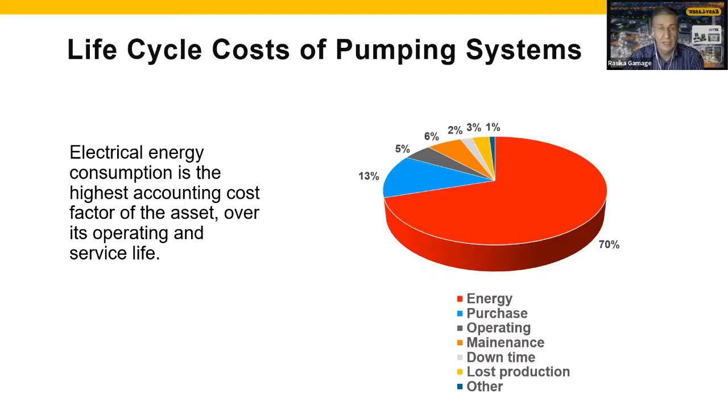So first, what does it actually cost to operate and own a machine? You may be surprised: electrical energy consumption is the highest cost factor for an asset over its operating and service life. 70% of an ordinary machine, taking an example of a pump, is associated with the use of energy during the machine's full life cycle. It's quite high compared to all the other parts like purchase and other operating costs related.

What does shaft alignment actually mean? We're talking about rotating equipment that is connected to each other.

Shaft rotational center lines aren't collinear at a point of power transfer when the machine is in operating condition. Whenever we have this kind of condition, the machine is misaligned. In operating condition means in a warm situation, where the machine parts have reached their operating temperature.

There's also something considered as temperature growth or thermal growth, especially with gas and steam turbines. The savings that can occur from precision alignment are often overlooked, while energy represents hundreds of thousands of dollars in the operation expenses of a whole plant. A significant portion of these costs are purely waste, because misalignment of coupled machines costs us valuable energy dollars.

Precision alignment of machine shafts has proven to cut energy costs by as much as 10%. Now you would say for one machine, 10% energy could be, depending on the country, affordable, not expensive, but nevertheless 10% over time for many different machines can make a lot of money.

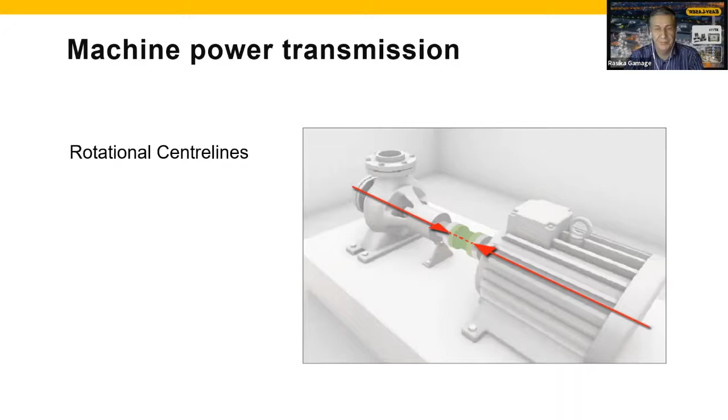What is misalignment? We differentiate here between two main causes. The first one shown is angular misalignment. That is when the center lines of the two axes, the shafts of our machines which are connected with each other, are not parallel to each other in operating condition.

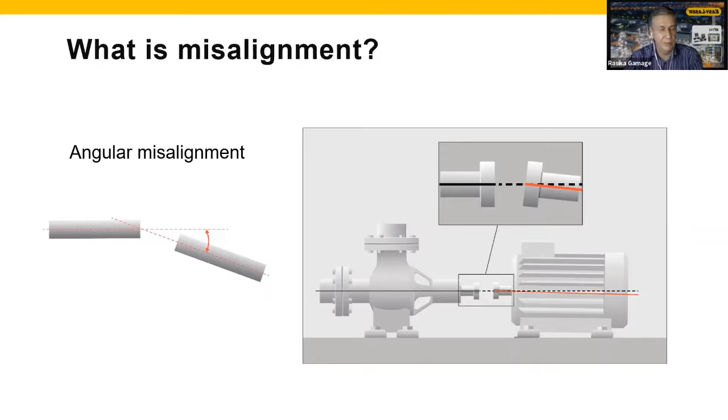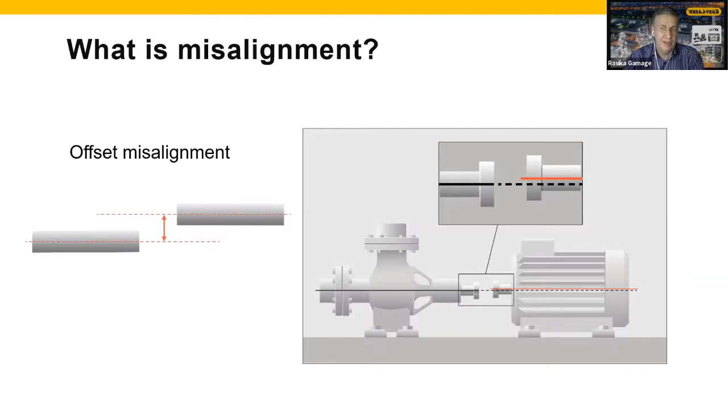And the second is an offset, also called parallel misalignment. This is the case when the center lines of two axes are not concentrical, but they are parallel. Realistically, in practice on a machine, you will find a combination of both. So angular and offset misalignment come together very often.

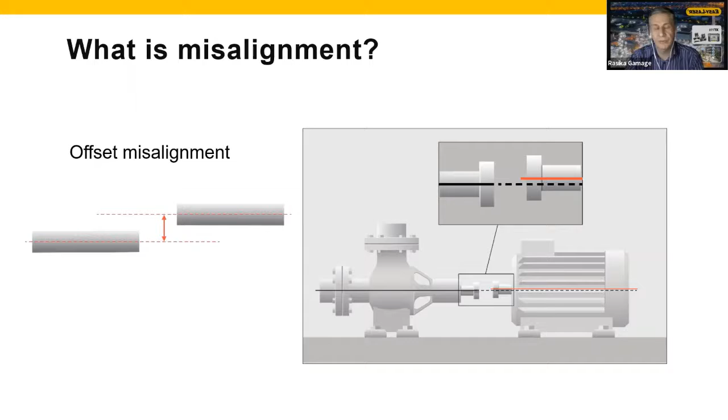Now, if you think about the consequences of misalignment and the physical motion of a rotating machine, I tried here to illustrate it in a simple way, referring to the bearings. The bearings ensure rotational movement through their construction to reduce the friction of the rotating shafts in their housing. So to eliminate and reduce the friction to a minimum, we use bearings.

Inside these bearings we have a lubricant. This lubricant is found in a very thin gap between the two surfaces, the raceway from the inner race and outer race, and the rolling elements in between. Now, the thickness of this lubrication film is about 5 microns thick.

So if you consider even a load zone and a small twist of the shaft that pushes the bearing to one side, as indicated on this picture, we are creating stress. And 5 microns is actually not a lot. So therefore, we are creating a potential impact and stress component that damages subsurfaces in the structure of the bearing.

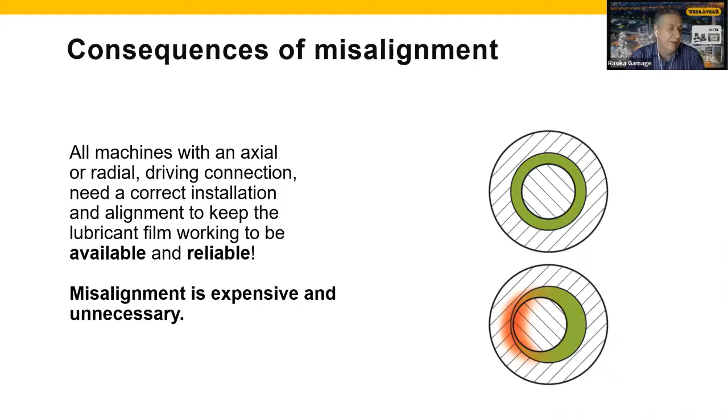This kind of damage, which you cannot see at this stage, is generating and getting worse over time until the bearing is damaged. So all machines with an axial or radial driving connection need correct installation and alignment to keep the lubricant film working, so that the whole machine is available for a long time and, in the end, reliable.

How do we recognize misalignment from an operating machine? Misalignment is the root cause of many machine breakdowns. Often technicians, floor shop people, and engineers talk about the most occurring problem on rotating machinery being bearings that are failing. And it is correct, but there's a reason why this bearing is failing.

Other cases, maybe seals are damaged, shafts and couplings. In fact, it is widely believed that 50% of all machine failures are due to misalignment of the machine train or coupled machine. So precision alignment significantly increases the life of the machine.

Misalignment itself leads to stress and forces on the bearing. Misalignment can be very dangerous and also harmful. And again, it is actually expensive and unnecessary.

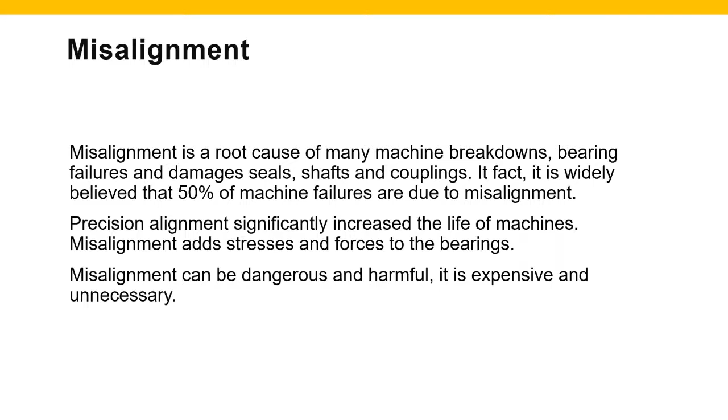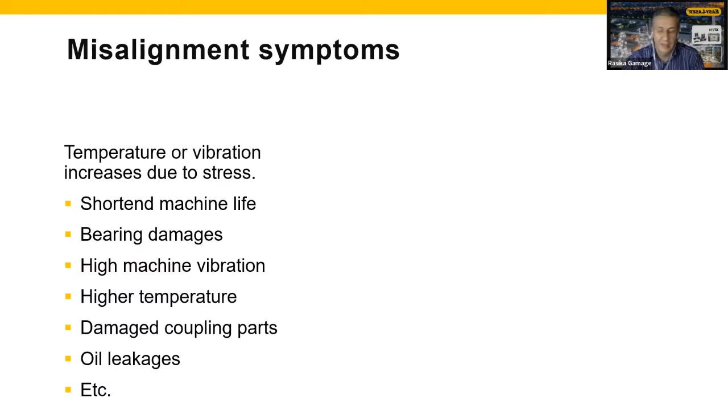Symptoms to recognize machine shaft misalignment are, of course, temperature, because wherever you have friction as a consequence of some stresses, heat is developing. And further down, vibration occurs. So temperature and vibration are good indicators to assume there is some stress, which in most cases is related to misalignment. But also shortened machine life is a symptom.

Damaged bearings is a symptom. High machine vibration, of course, higher temperature, damaged coupling parts, oil leaks, etc. So we see here some pictures from a thermography image of an operating machine with hotspots of temperature indicated, because there is some stress in this machine. We see measurement readings in ISO millimeters per second, which is the velocity unit of vibration in the machine.

If you would do, as a vibration specialist, a deeper analysis to diagnose, then it could be a frequency spectrum where the order number 1, 2, in some cases even the third order, are associated with symptoms the machine can have regarding misalignment. So orders means frequencies associated with the running speed of the machine times 2, times 3, etc.

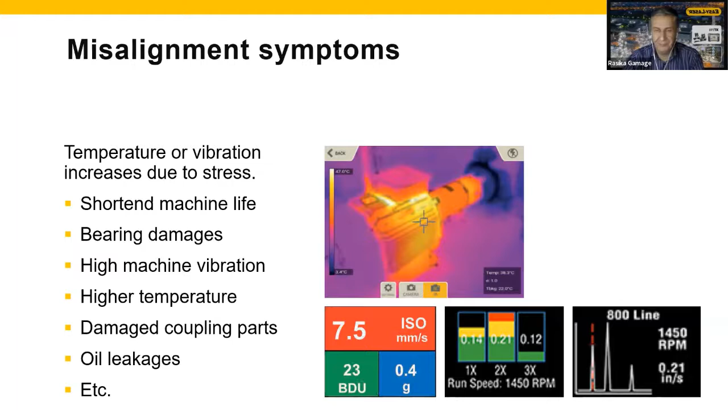How to verify misalignment? Well, it's a very easy task if you have the equipment available. So perform laser shaft alignment with a precision of up to 1 micron, which is 1/1000th of a millimeter, to check and compare it to tolerances. Laser alignment instruments can have built-in tolerances, which are based on the machine size and speed, and then you can compare it.

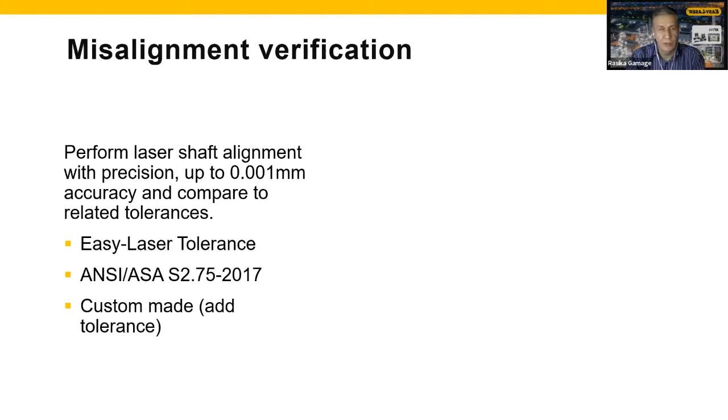Easy Laser, for example, in their alignment products have their own tolerances, but we're also using global tolerances like the ANSI standard, American National Standards Institute. And for some very special cases, customers can also create their own custom-made tolerances.

So an alignment check with a laser represents once the shaft from the stationary machine, and second, from the machine that is possible to correct in its position, called the movable machine. And this requires only a couple of minutes to check the condition of a machine.

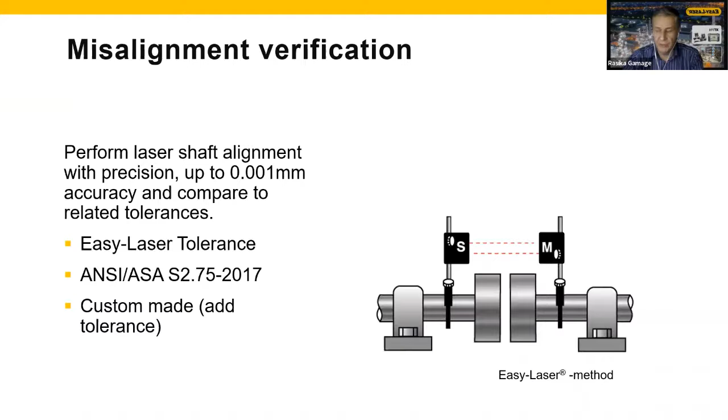Now, we want to ensure that the machine is precisely aligned, and this starts actually on the foundation. So whenever we talk about precision and energy savings, we also assume that the base or frame structure of the machine is actually very flat. In some cases, it's even required to be at a certain level. It should not have any soft foot problems, looseness, or runouts of parts of the machine itself.

And then we can proceed to do the corrective action to align machines. That means bringing shafts, rotational center lines, collinear at their operating condition. And that's, with a laser instrument, very easy to achieve, pretty straightforward—much faster than traditional methods where you need to be highly skilled to use dial gauges, and it is way more accurate than that.

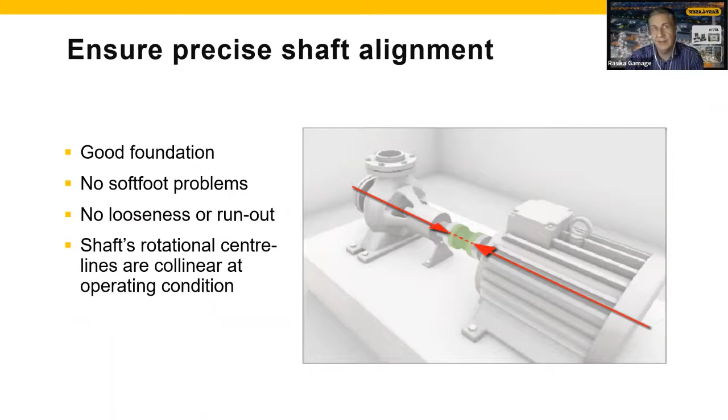Misalignment and energy consumption. Before we get to this point, I'd like to show you what actually means precise shaft alignment. While there are a number of factors to consider, the key issue when it comes to the relationship between misalignment and the damage that can be done to the machine is the machine speed. So if the speed of the machine is greater, the damage potential to the machine is also greater.

Here we see a misalignment tolerance guide that gives us the micron per millimeter, which is the deviation of the point of power transfer between the two shafts connected through the coupling. On the right axis, we see the angle of potential misalignment in degrees, and on the x-axis, you can see the connected speed. So the higher the speed, the lower the allowed angle in angular misalignment, or the deviation from transmission in the center of the shaft.

Just taking an example from a 3000 RPM machine, the permissible alignment condition between excellent and acceptable is 0.8 micron per millimeter—that's the diameter of the axis of power transfer, and that's pretty precise. A laser alignment instrument can achieve an accuracy of 1 micron, so right where we need it in regards of where alignment is necessary. Where we're reaching the red area, that's harmful for the machine—that's 1.2 micron for a machine running at 3000 RPM.

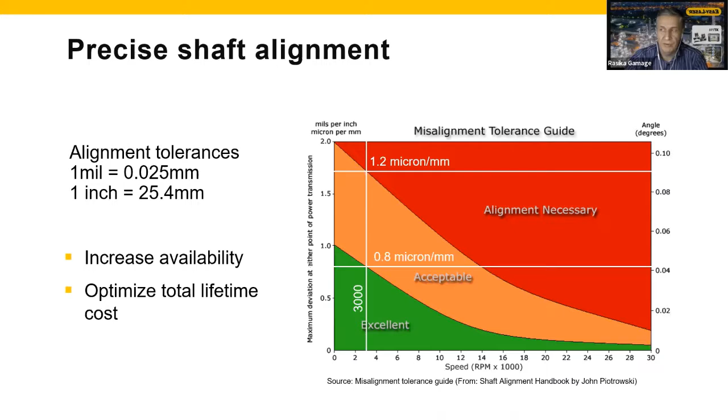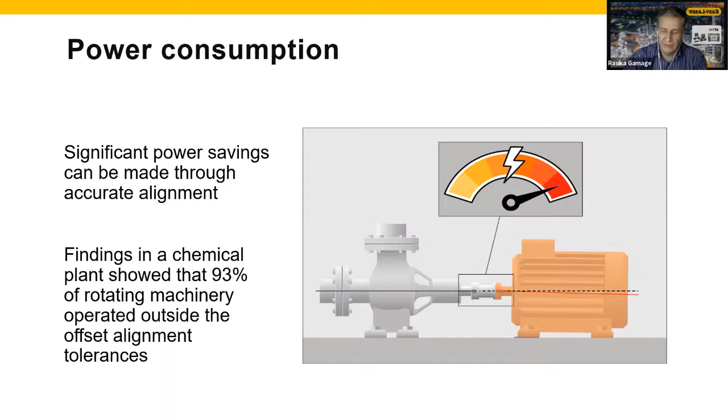Significant power savings can be made through accurate and precise alignment. Here we show findings researched in a chemical plant, which showed on average that 93% of all their rotating machinery was outside of the tolerances we just saw. Tolerances exist on the market to compare to. Precision alignment reduces energy consumption, and this reduces energy costs. Energy consumption has the greatest potential to reduce costs among all of the machine life-related factors. We're coming soon to a couple of examples—this is the potential we mentioned earlier on another slide.

You can actually save up to 10% quite easily when your machines are in a precision alignment condition. So precise machine alignment eliminates the reaction forces and reduces the energy consumption by up to 10%.

This is a completely independent study from a university that shows a misalignment condition of 1.6 millimeter compared to 0.2 up to 0 millimeter. And what is the energy consumption here in comparison? We're reaching between 0 to 12%, 10%. So this is really the potential of saving energy.

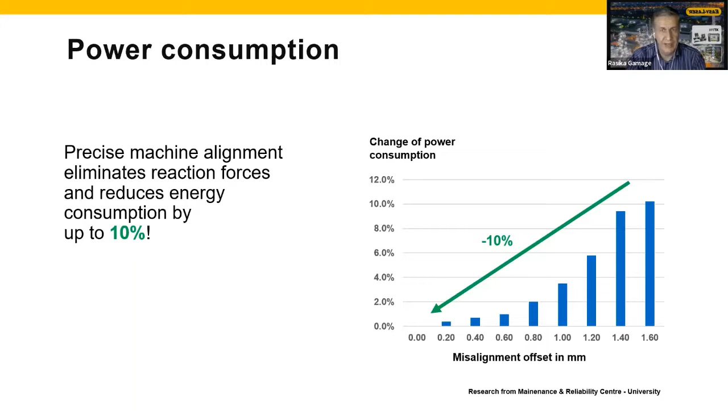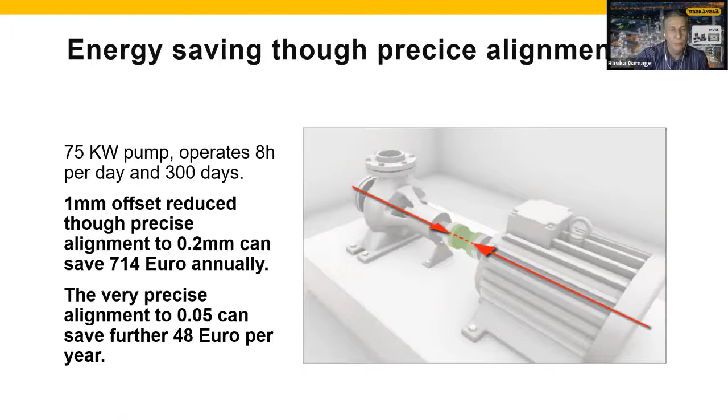Other costs here are associated with precision shaft alignment. Again, we're coming back to the bearing because they are very crucial. And they are also the components that suffer the most from an existing misalignment. So misalignment puts unnecessary load and forces on the bearing.

All the experts and many researchers worldwide have proven, and all of the experts agree, that actually less than 10% of all operating machines, and here related to the bearings, reach their designed lifetime. That means they fail before they are doing the specified work. And this is due to many causes. One of them, contributing to 50%, is misalignment.

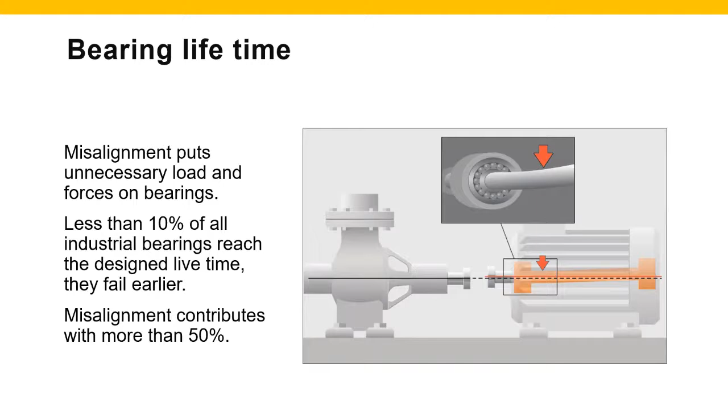Here's again another study also from a university that shows the difference between an offset misalignment of 1 millimeter versus 0.2 millimeter. And this has shown that the lifetime of the bearing can increase by 50%. So if we are taking away the stress, as this graphic shows, from our rolling elements inside of the bearing, we extend therefore the lifetime of the bearing. And this is a consequence of a precision alignment of the machine.

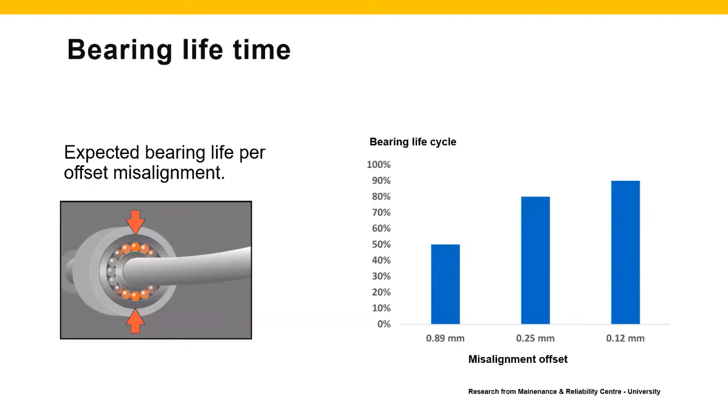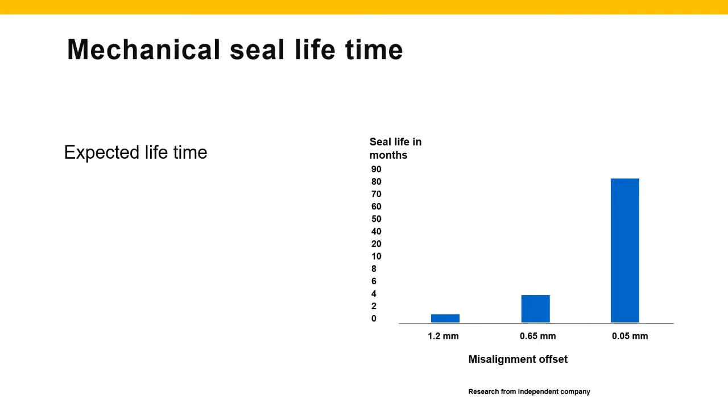In studies that have been done, so sorry for the long text and the numbers, but that is what energy or cost savings is about. A study has shown here that tests on smaller pumps, the current drawn by a motor was 12.2 amps. After being realigned, the current was put down to 11.8 amps, which is a difference of 3.28%. If we are a little bit conservative here and say, well, we're not taking this 3%, we actually go only down to 1%, then the energy saving cost per year for this one machine is 107 euro.

But 1% versus 10%, so you can maybe see or understand what is the potential between a precisely aligned machine and a machine that has a misalignment.

Now, the plant has here, so that's not something Easy Laser has done, a completely independent party researched a couple of machines. There were 30 pumps, 5 fans, 4 compressors. This is a mixture from their power consumption, and all of them have been monitored over a long time. That was back in 2002. So those machines have been operated 24/7, and the difference between the misalignment initial stage and the stage where all of these machines have been aligned with higher precision according to the tolerances, in regards of the percentage and energy saving altogether per year, is 4,384 euro. And this is just for 39 machines.

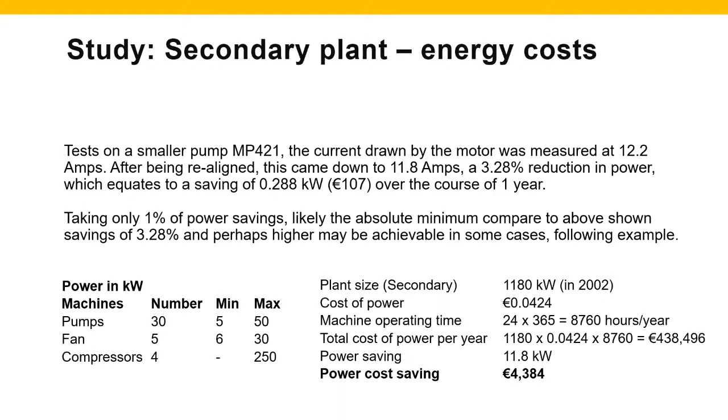Another study here, secondary plant, same related study but another part of cost. The same machines have been investigated in regards of the MTBF, the mean time between failure. This is the time interval recorded by the maintenance and reliability teams, showing how often a machine shows failure and needs to be maintained or repaired.

Aligning machines with a straight edge, not even with a dial gauge, for the same 39 machines, results in an MTBF interval of 6 months. Taking the average cost per machine of 344 euros, all of them together came to a summary of 26,000 euros.

Now the same machines aligned with a laser instrument removes the stress, and the alignment condition is inside of the required tolerances. As a consequence, the machine is not failing that often. The time interval between a potential repair and the next one is largely increased, to an average of 20 months compared to 6 months.

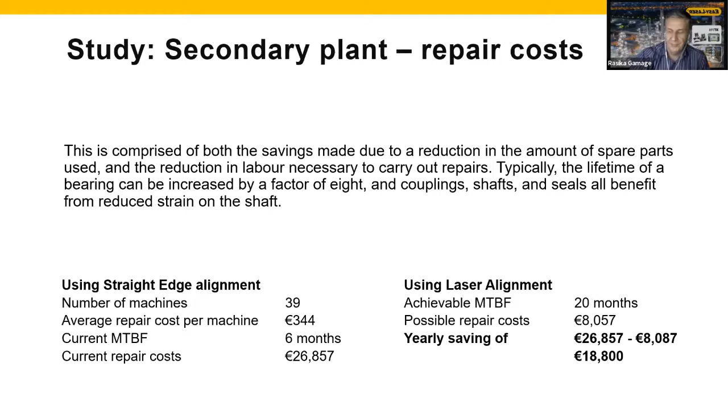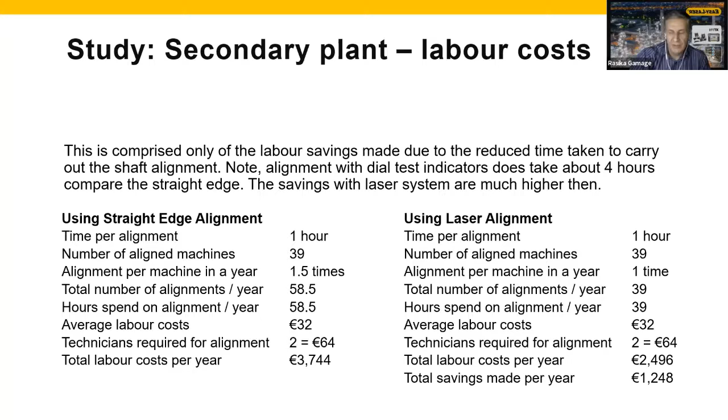We're having yearly savings of up to €18,800 just for the repair costs itself, which includes spare parts, etc. If you think about the same costs for the technicians and engineers carrying out those repairs, then we come down further to a point of saving 1,248 euros more. So now putting all of these numbers together from 39 machines only.

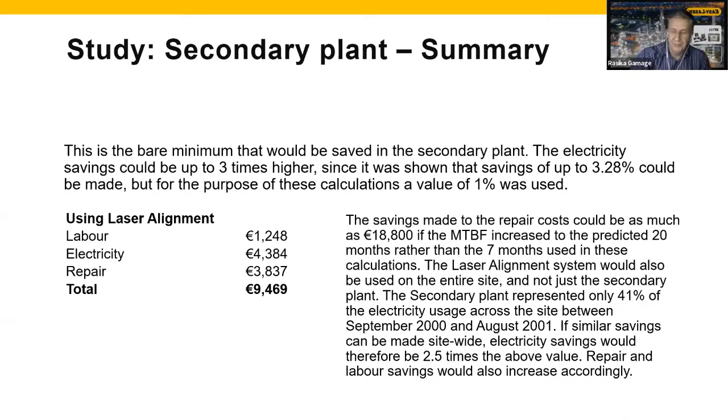But this is not even the tip of the potential savings that can be achieved when we talk about precision laser alignment. In summary, machines like pumps etc. with speed about 3,000 RPM or more.

The tests that have been done were in a chemical plant, and to just repeat this information, only 8% of their machines are actually inside of acceptable alignment tolerances. So aligning them in a precision mode can save us up to 10% of the power consumption, and can reduce costs in regards of bearings and seals by more than 60%.

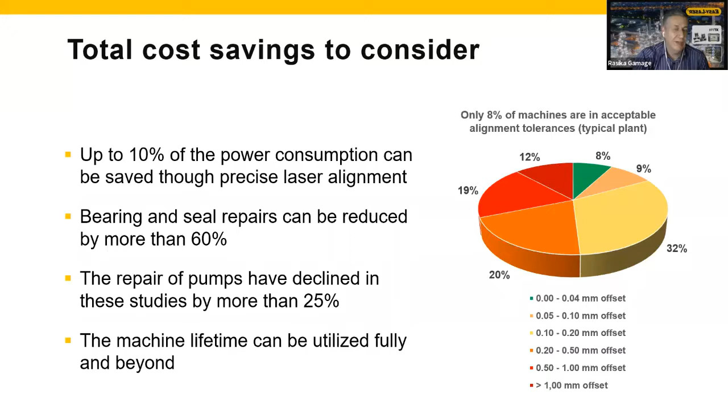The repairs for the pumps have declined in the study by more than 25%, and the lifetime of this machine has improved and increased, so it can be utilized fully and beyond. There's a lot of saving potential in an operating machine when we talk about precision alignment.

To summarize, benefits of precision machine alignment: increased lifetime from operating machines, reduced costs of spare parts, bearings, mechanical seals, reduced maintenance and labor costs, and improved planning. So those maintenance engineers get more time to do different tasks and jobs, maybe inside of a condition monitoring program or aligning other machines.

Reduced costs on brackets and documentation issues. That's in regards of comparing laser alignment with dial gauges, where you need many different brackets, and even if you apply it, you still have this kind of evidence need - you need to write a protocol by hand. A laser instrument generates the report on the instrument itself, and sends it out via email to a manager, a supervisor, or a customer.

Other benefits are improved plant operation and reliability, increased plant availability, reducing power consumption at the plant, improved plant operating safety, and a contribution to a cleaner environment.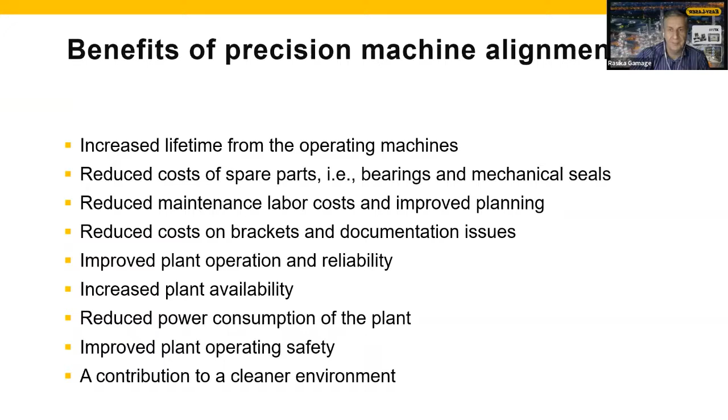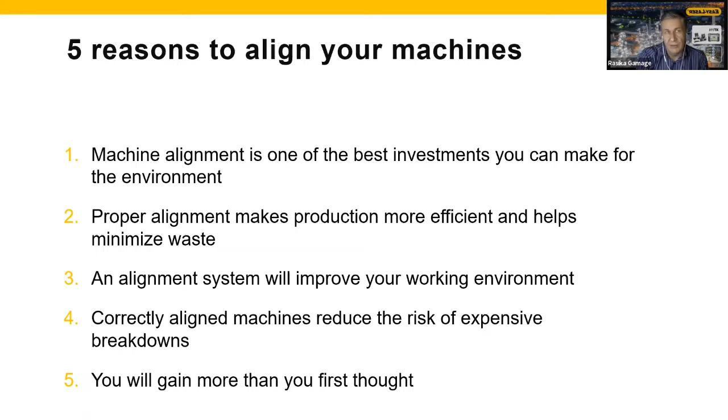This is actually the highest cost factor. So if you are increasing the mean time between failures of this machine, you are having there an even higher potential of saving costs. You will gain more than you first thought, just through precision alignment of the machines.

We recommend a certain step-by-step procedure in regards of alignment. There are some checks to do before actually correcting the physical position of a machine. Safety always first, clean, we deal with shims and corrective measures to do that really in a good way. There are a few preparations under point number 1. Point number 2 is kind of rough alignment to make sure also that all of the bolts are tightened - remember, no loose parts, no hold down bolts and things like this.

Number 3 is setting up the laser instrument, putting the brackets on the shafts and adjusting them initially. Then you can achieve very easily on this position already an alignment condition that is smaller than 0.5 millimeter. And then your real physical position alignment starts, where also the soft foot of the machine is checked, which you can then achieve an alignment condition of 0.05 millimeter very easily.

Check it, verify the results after the machine correction has been proceeded. So the instrument tells you how to align the machine. Save the file for later, so you can use it maybe 2 years again on the same machine. And the instrument provides you a report with all of the details that you can send to the customer, to your operator or supervisor.

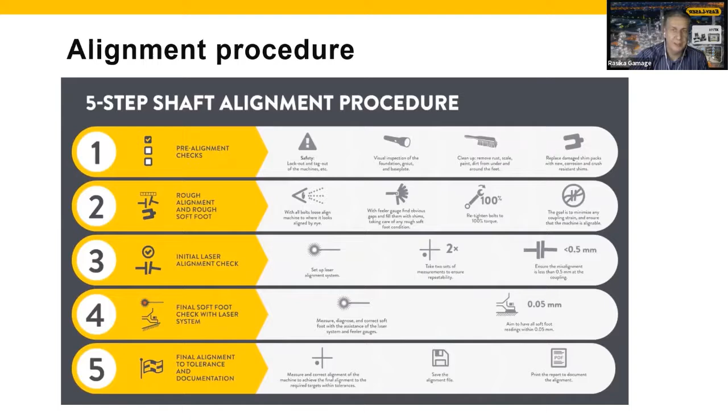If you're interested, I'm sure that this forum can potentially share this presentation later. So you find on our Easy Laser website all of those kind of articles that are shown here as a web link in regards of justification for doing laser shaft alignment.

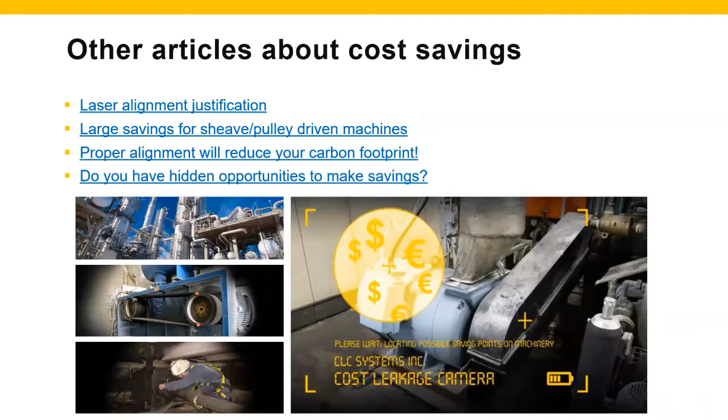So what are the benefits? Why are so many operating maintenance departments actually doing that? There are large savings when it comes to sheave and pulley driven machines. Proper alignment will reduce your carbon footprint, which we have explained today, and there are many other different hidden opportunities to make savings. Thank you so much for your patience.